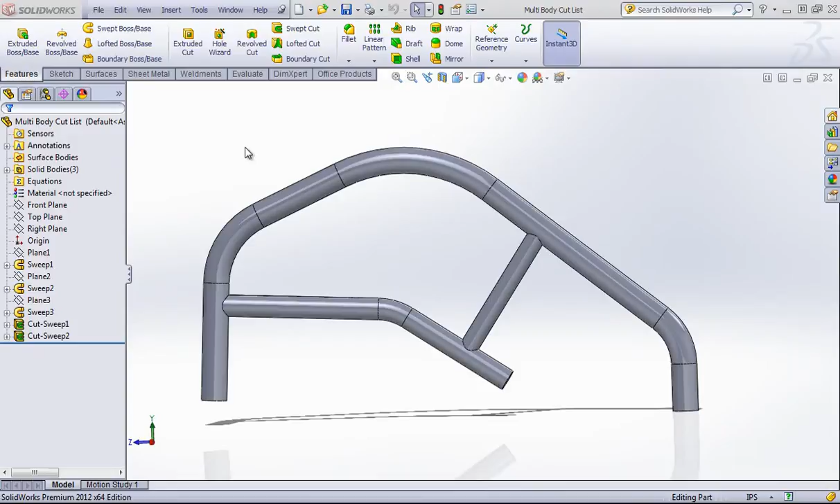If you're familiar at all with weldments, you've probably worked with a weldment cut list. Anytime you create a structural member, it's added to a cut list, and this can be brought into a drawing and displayed as a table. But what a lot of people don't know is that you can also apply this method to a multi-body part.

So if you're creating features using the standard features, extrusions, sweeps, lofts, for example, by default there's no table that you can generate from your solid bodies. And you might want to create a table in a drawing so you can keep track of what parts and what features you have in a certain part or assembly.

So the first step to creating a weldment cut list from a multi-body part is to activate the Weldments tab, or just come into Insert Weldments and choose this weldment option. Now immediately this switches the solid bodies folder to the cut list folder. But if you've worked with structural members, you'll also notice that in a weldment, these will all be in their own folders.

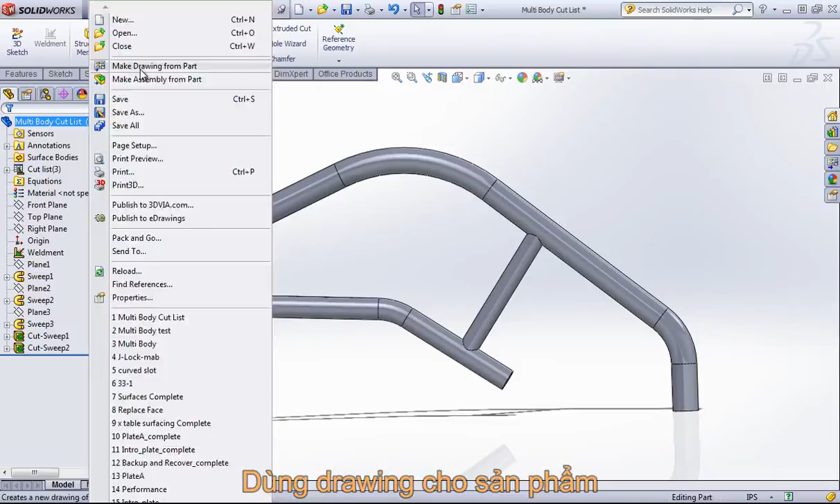So to get this to show up in a drawing, we have to right click into the cut list and choose Update. And then we can choose to make a drawing from the part. Once I bring a view in, I can come into Insert, choose Tables, and choose Weldment Cut List, and bring this in.

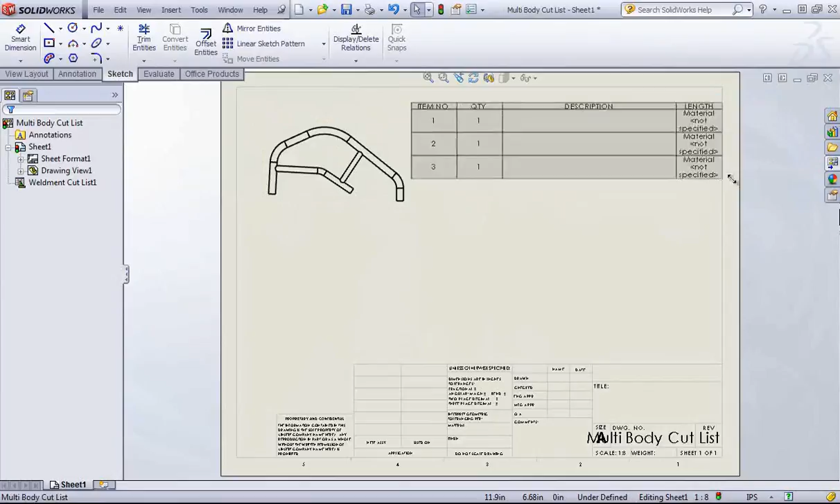Now when you do this with a multi-body part, you're going to get 4 columns. You'll get the item number, quantity, a description, which you'll have to fill out from the custom properties if you want this to populate, and length, which ends up for a multi-body part being the material. So in this case we can just change this over to material, and if we specify material for each one of those bodies, that's going to show up in the table.

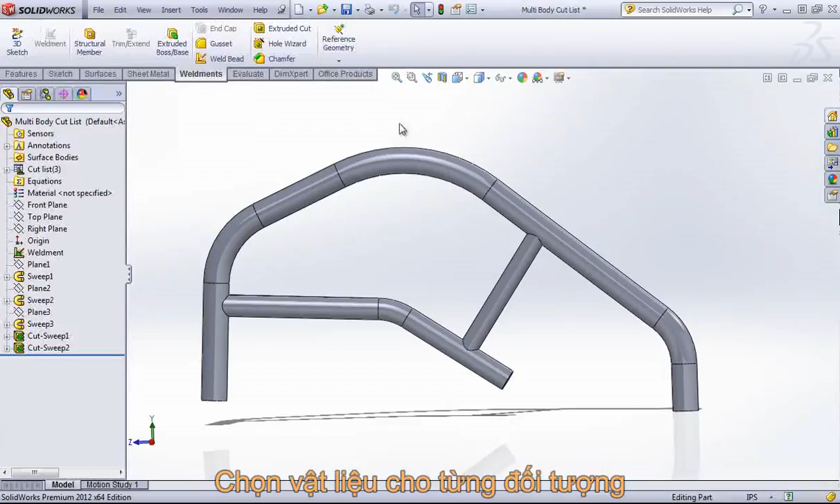So if I right click into the material and choose a material for each one of these, each one of those will now populate into the table.

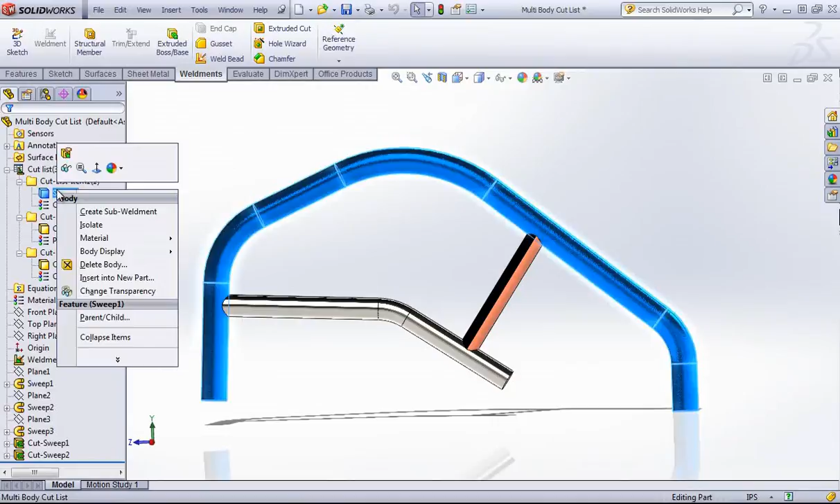The description section is a useful place to actually put the title or the name of the body. And we can do that by right clicking into this folder and going to Properties and choosing Description. In this case I'll just call this top tube. I'll go ahead and call this bottom tube.

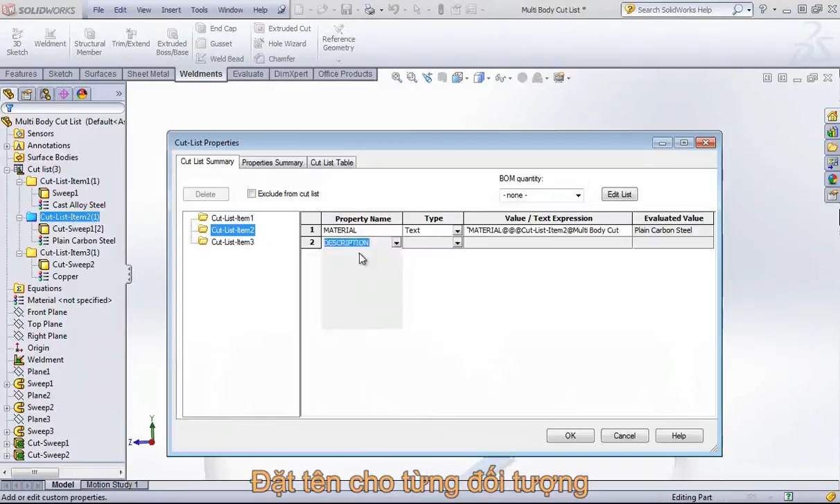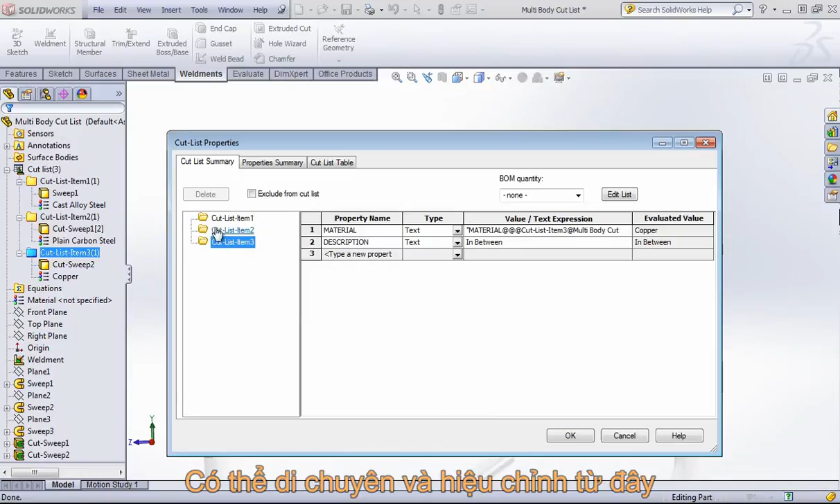And I can call the last one another name, maybe in between, or whatever I would call it. You can also move in between the different items in your cut list and modify the properties from here. Now if we look into that weldment cut list, you can see now all those descriptions have populated.

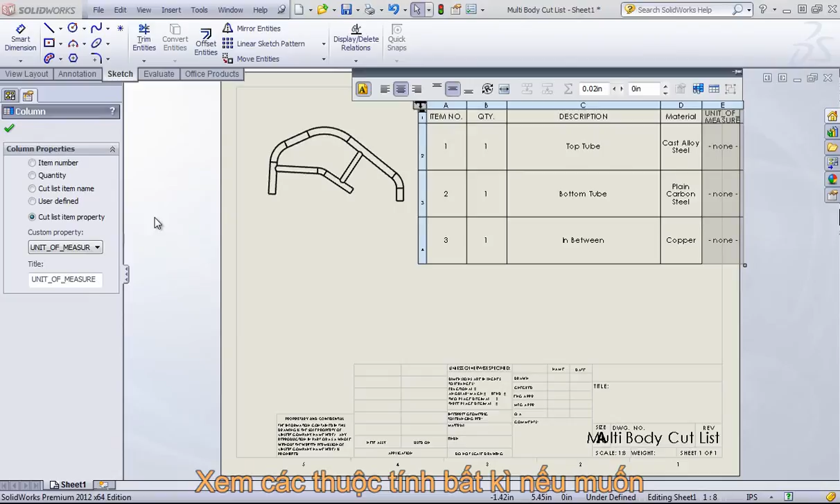And if we want to add any columns, we could always right click in and say Insert Column. And then if we go to the column properties, if we've defined any other properties, we'll be able to select them out. For example, if you did have a length or a manufacturing process, you can add those in.

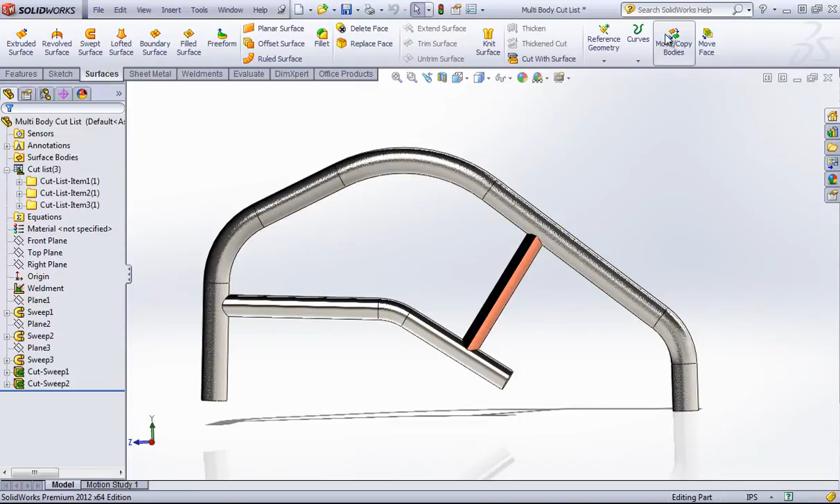Lastly, this quantity updates for any identical bodies. So if, for example, I use the move copy bodies command, and choose the copy option, if I go ahead and update this, it'll populate into that cut list.

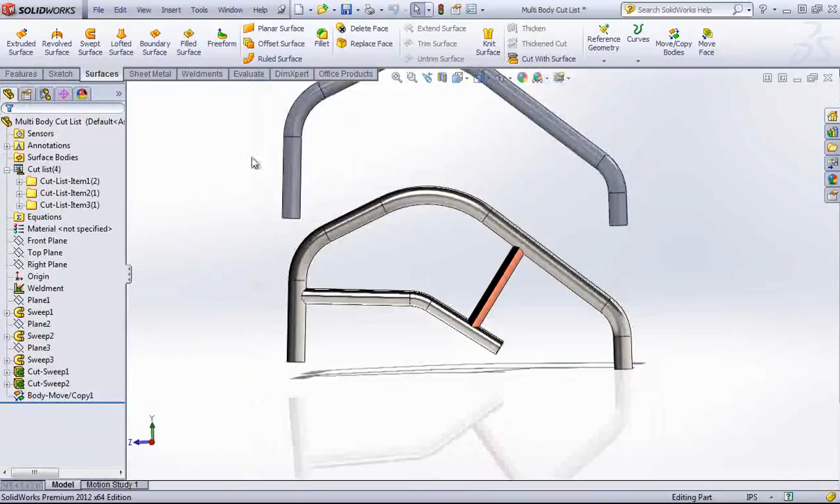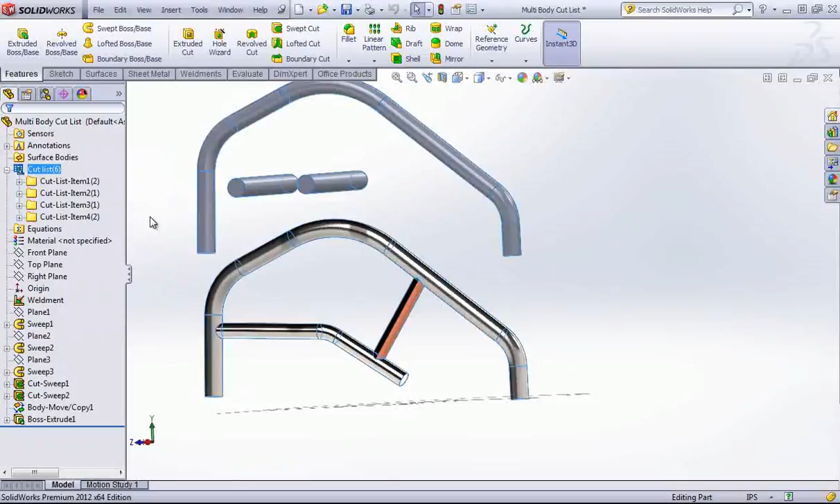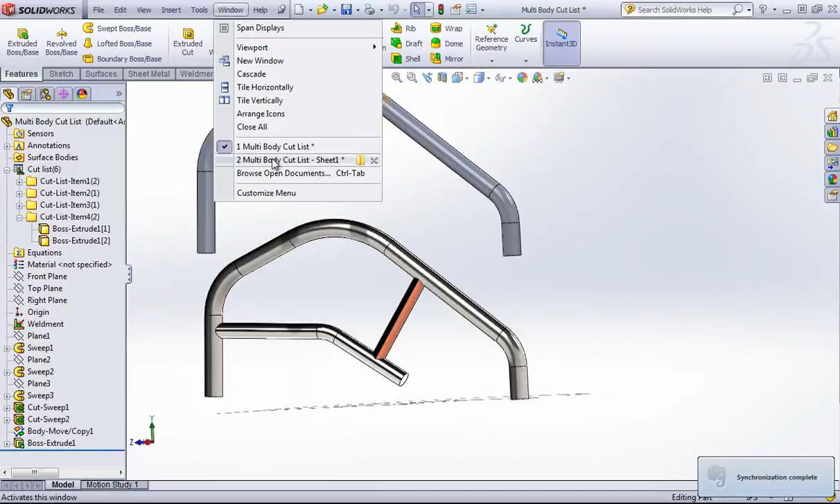And similarly, if I were to create an extrusion with two different bodies, let's say two cylinders, and made the diameters equal, and once again update the cut list, that's going to bring this into its own folder as well. And I can once again add a description. And take a look at the table. But that's how you create a weldment cut list from a multi-body part.